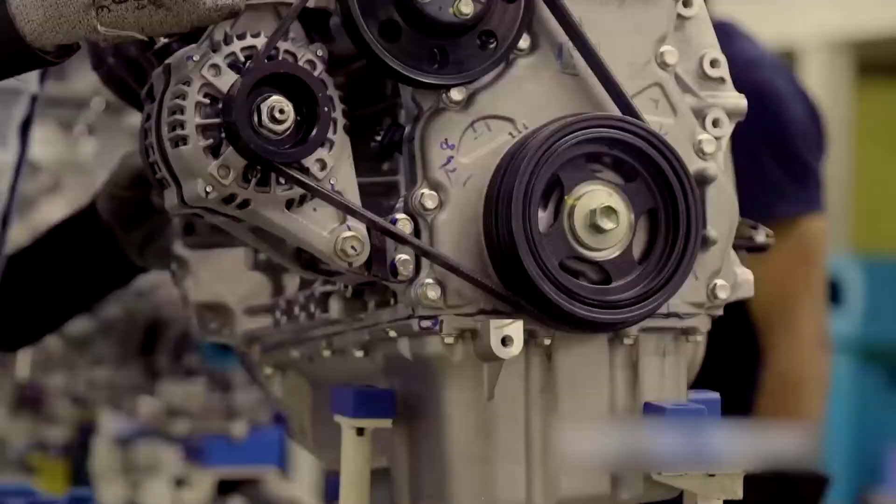Sustainable development is the only option. With half the planet already living in urban areas, and with each passing year, more and more people are drawn towards the urban lifestyle. For some, every challenge is an opportunity to test the mettle. No task and no milestone is unsurpassable.

This is the trait and temperament that defines the character of Ahmedabad Urban Development Authority. As a premier urban development authority, AUDA has always excelled and performed in the interest of the people at large in town planning schemes and implementation of infrastructure projects. AUDA enjoys ardent support from the state government for actualizing the dream of our Honorable Prime Minister, Shri Narendra Modi, to provide a better quality of life and services to people by implementing the Urban Project.

Realizing urban projects with compatible infrastructure that matches with standards of metropolitan cities will support balanced growth of Ahmedabad and Gandhinagar. The unequivocal credit for this feat goes to Team AUDA, guided and nurtured by the Chief Minister of Gujarat, Shri Bhupendra Patel. AUDA is dedicated to bringing urban dreams into reality by creating future-oriented plans and following up on them assiduously. This dedication of the AUDA team has resulted in the kind of public support no other urban development authority enjoys.

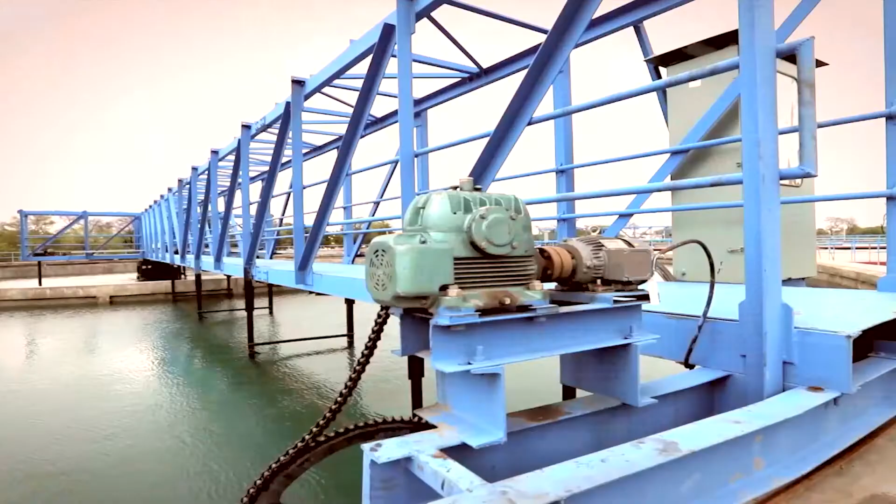Established under the Gujarat Town Planning and Urban Development Act of 1976, AUDA began its journey on February 1, 1978, marking a new era in the planned and balanced urbanization of Ahmedabad.

Currently, AUDA covers the entire area of 1,866 square kilometers, including 488.17 square kilometers area under the Ahmedabad Municipal Corporation, 34 square kilometers under the Gandhinagar Municipal Corporation, 5 growth centers of Kalol, Dehgaam, Sanand, Bareja and Mehmedabad, and 159 villages in the vicinity.

With its dedicated strong team, AUDA has developed several world-class facilities and handed over many of these utilities to Ahmedabad and Gandhinagar municipal corporations. Driven by its vision to make Ahmedabad urban development area compact, integrated, planned and well-connected, AUDA is continuously striving for sustainable urban planning.

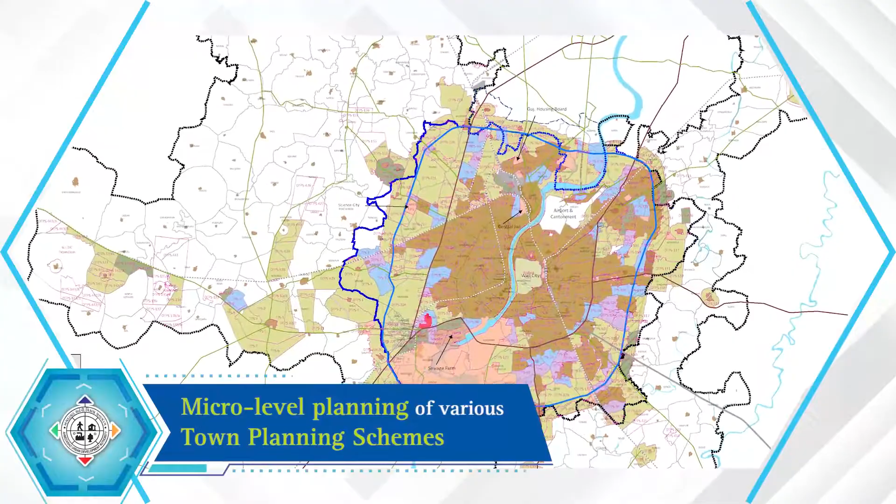Development Plan 2021: to meet the comforts and needs of the area, AUDA conceived the Development Plan 2021. The three-tier planning envisages firstly a macro development plan, planned through micro-level planning of various town planning schemes, followed by a local area plan, involving the retrofitting of the existing area for accessibility, walkability, connectivity and the refurbishment of existing physical infrastructure.

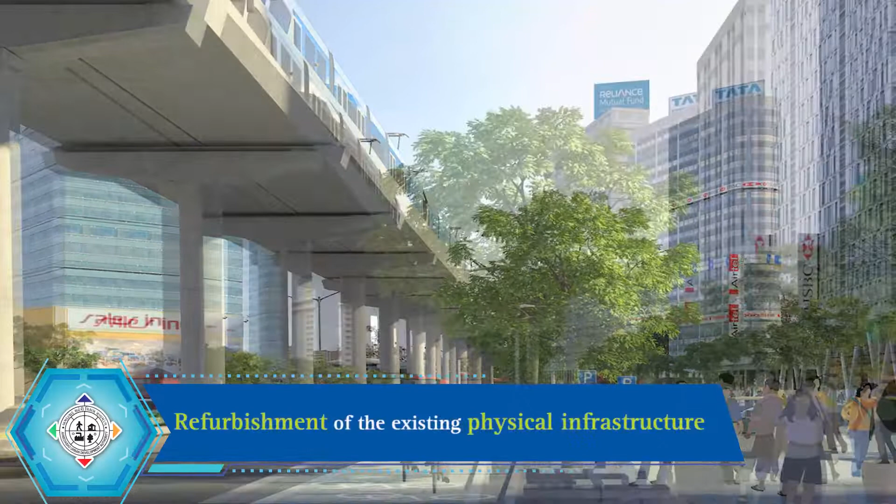It is estimated that 70% of the world's population will be dwelling in cities by 2050. This estimate predicts that Ahmedabad's population would shoot up to 108 lakhs by 2031. This poses both challenges and opportunities.

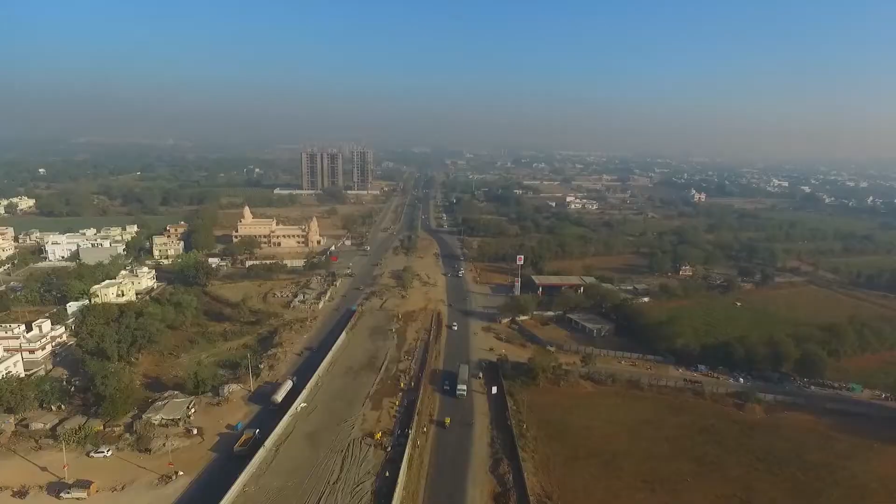To cater to the needs of the future population, Ahmedabad Urban Development Authority strives to implement urban planning and development practices with a focus on creating sustainable infrastructure to support its economic activities and overall growth, as well as facilitate a vibrant, lively and safe urban environment.

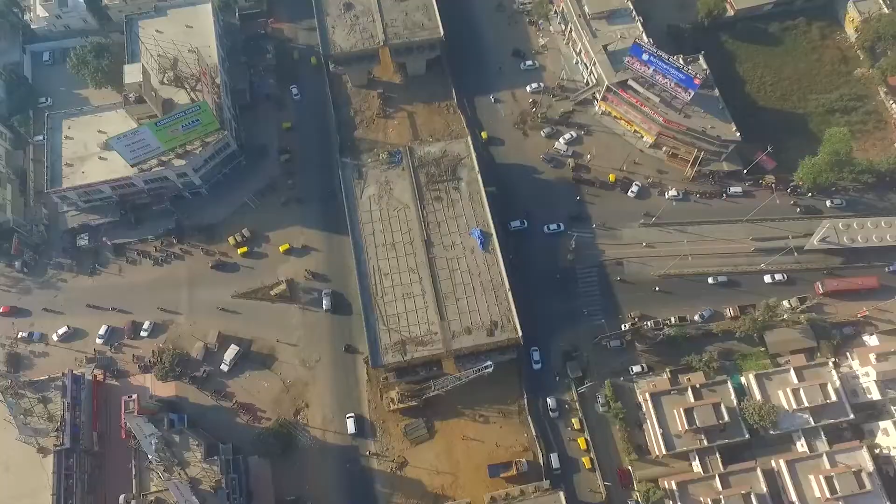Through AUDA's meticulous planning, Ahmedabad is all set to be a metropolitan city. Development Plan 2021 envisages a Central Business District or CBD, a transit-oriented zone or TOZ, a residential affordable housing zone, conservation of heritage sites, a dedicated freight corridor with logistics stations, a multi-modal logistics park to promote automobile and allied industries, besides fostering a green network.

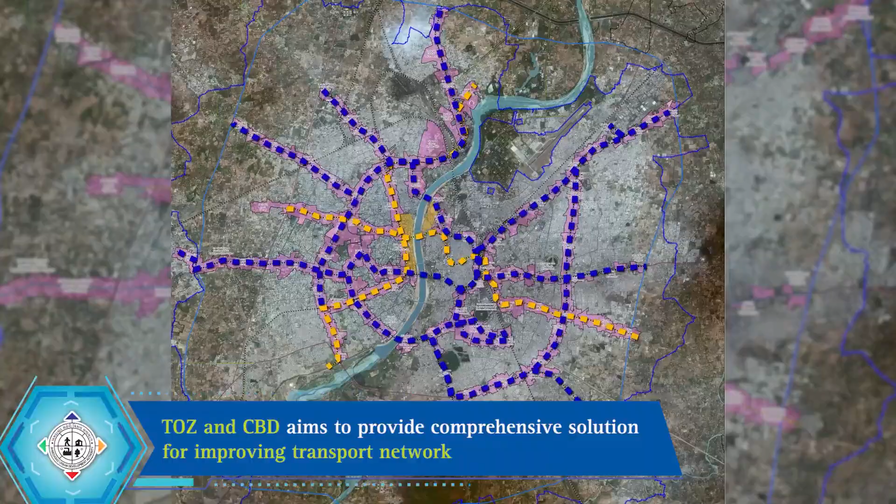Local Area Plan envisions both neighborhood-level accessibility and area-level improvement through a natural process of urban renewal and planned redevelopment. AUDA is preparing LAP and it is being implemented successfully by AMC. Local Area Plan for TOZ and CBD aims to provide comprehensive solutions for improving transport network, walkability and accessibility, implementing parking management, upgrading physical and social infrastructure, and enhancing overall livability and economic viability of a city.

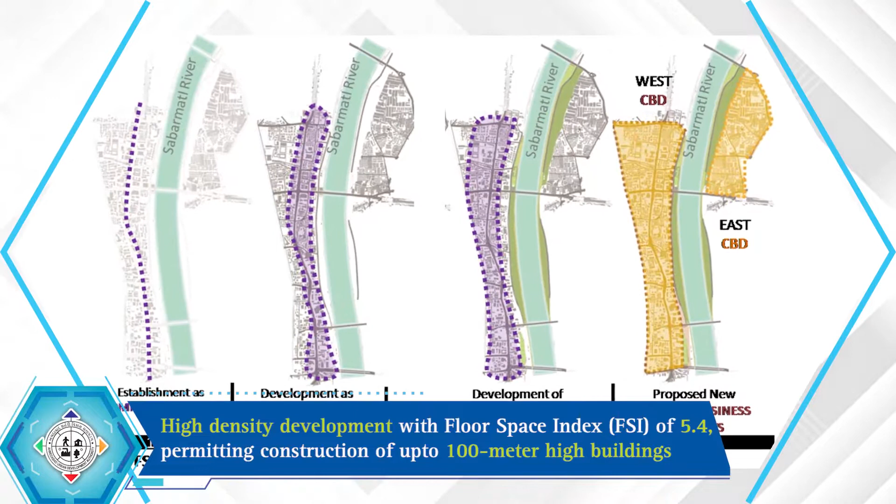Central Business District: AUDA has designed a central business district, ensuring easy mobility in high-density areas. To create a mixed-use, high-density district with a distinct character and a clearly identifiable urban form, AUDA has proposed high-density development with a floor space index of 5.4, permitting construction of up to 100-meter high buildings.

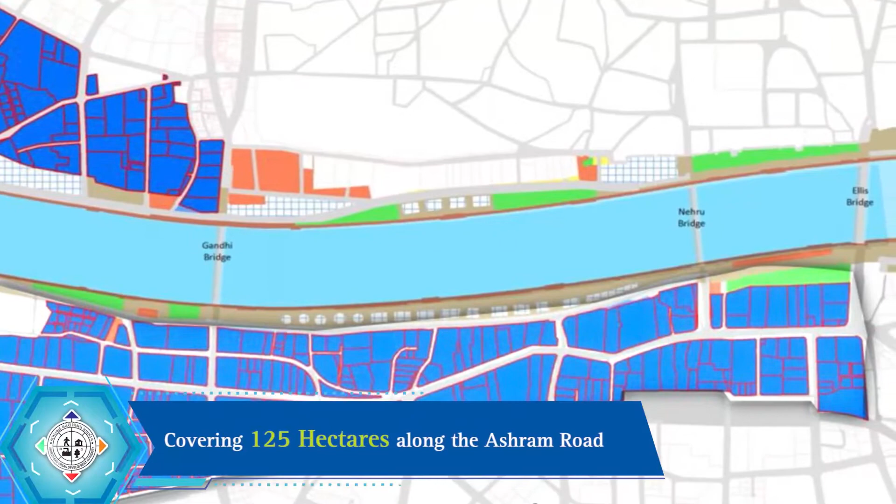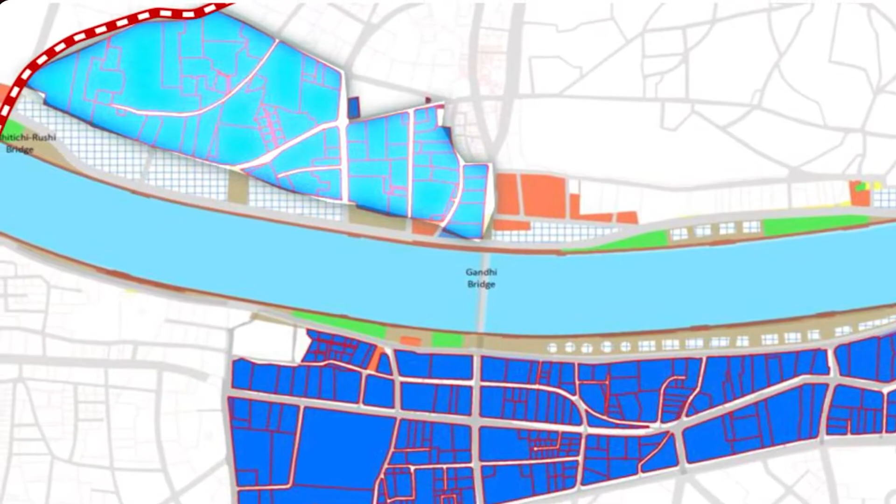These will come up on both sides of the rapidly developing Sabarmati riverfront, while one central business district focuses on the western side, covering 125 hectares along Ashram Road, a centrally located business hub of the city, between Ellis Bridge and Usmanpura. The second one focuses on the eastern side, on a 52-hectare area between Gandhi Bridge and Dudheshwar. Both the CBDs have bus rapid transit system and metro network connectivity.

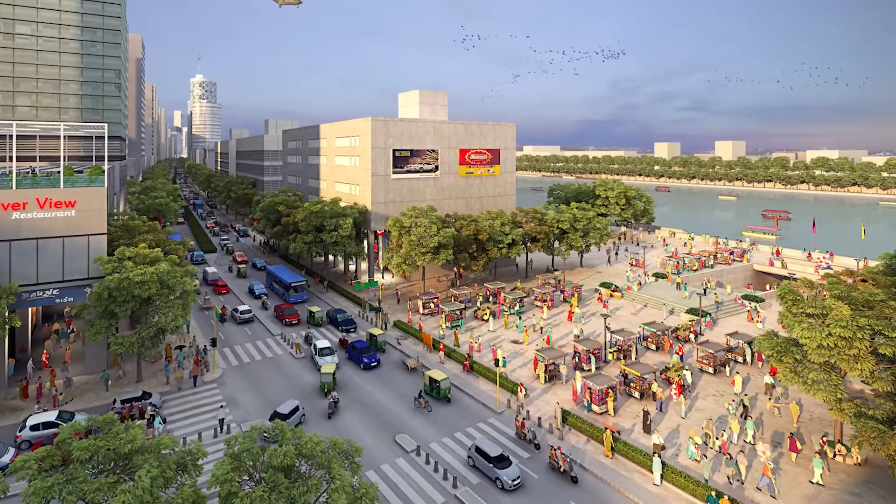AUDA has also provisioned for building a bridge to provide easy accessibility to both the CBDs. The CBD plans conceptualize a cohesive urban form and a pedestrian-friendly environment, besides arcades and wider sidewalks, to promote a mixed-use, transit-oriented, walkable CBD that is attractive for business, entertainment and tourism.

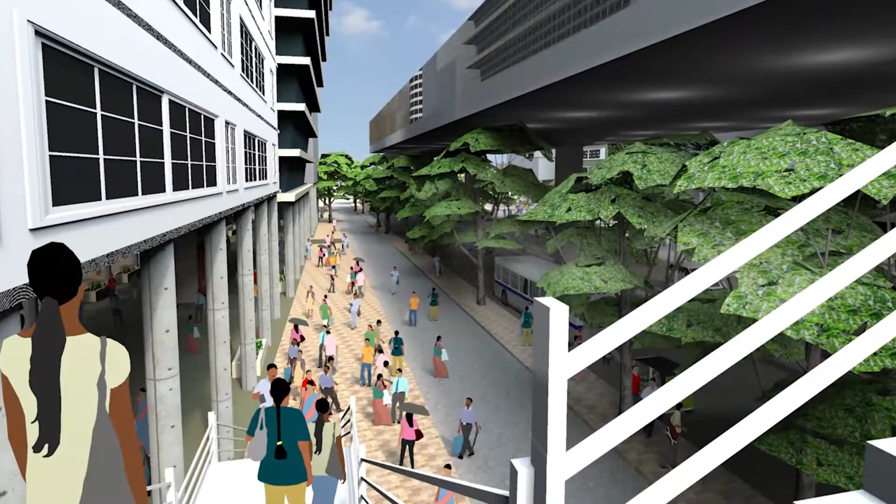Transit-Oriented Zone, or TOZ, is an effective tool to promote compact, mixed-use, high-density vertical development within walking distance to public transit routes, with a pedestrian-friendly and accessible public transportation network. It shortens commute times, promotes non-motorized transport and reduces dependency on private modes of transport.

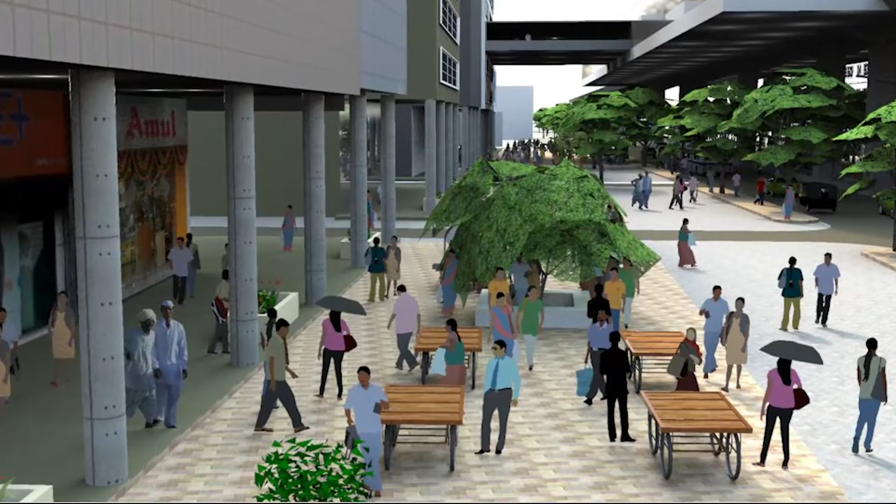Today, Ahmedabad already has an excellently connected road network of nearly 5,200 kilometers. The TOZ will make the city more livable by connecting places of work with residential areas, supported by walkable and cycle-friendly neighborhoods, reducing the carbon footprint in doing so.

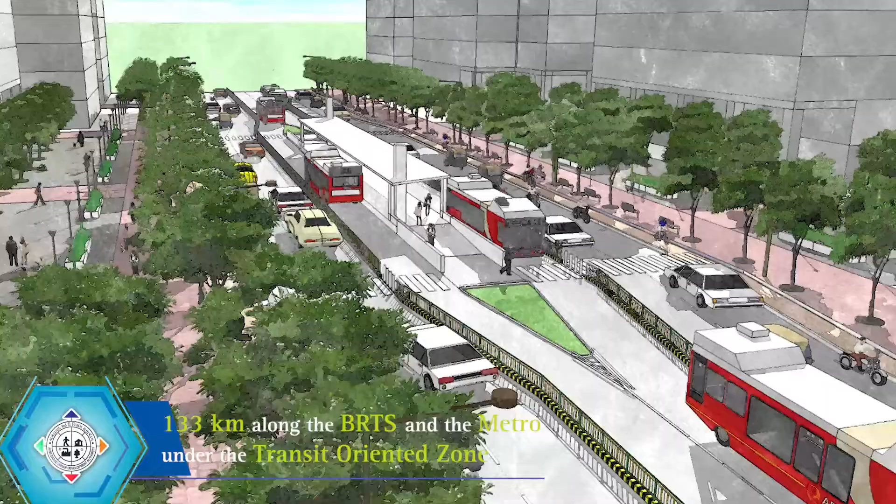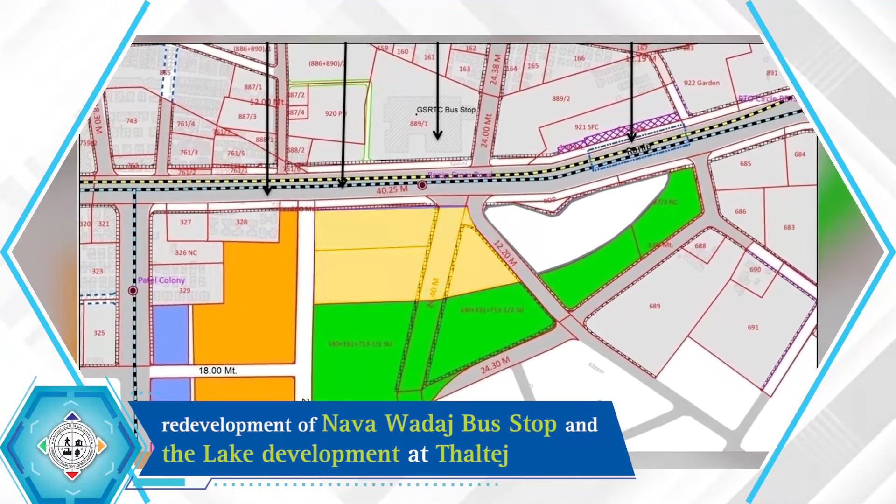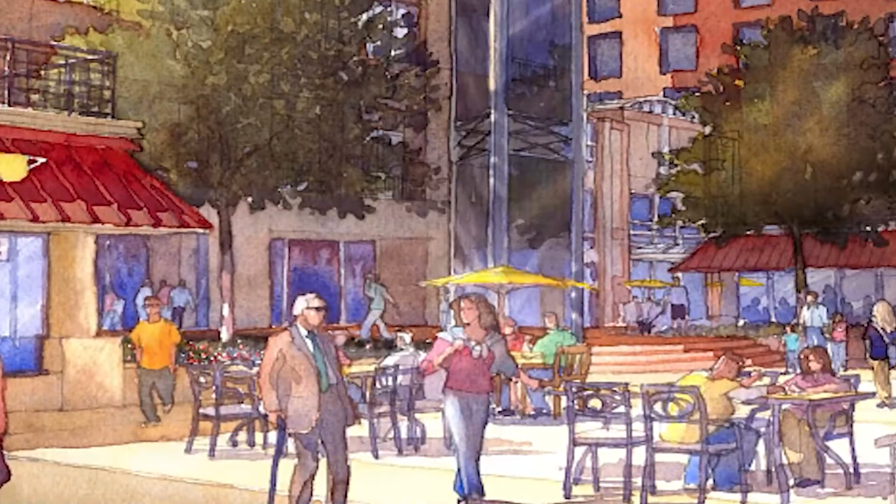AUDA has proposed to build a plaza with amenities like green and shaded seating areas, a pedestrian-friendly environment, public utilities and well-managed parking facilities around the 137 BRTS and 51 metro stations, providing an opportunity for commuters to relax, unwind and refresh themselves en route. CBD and TOZ are the modern-age urbanization wonders.

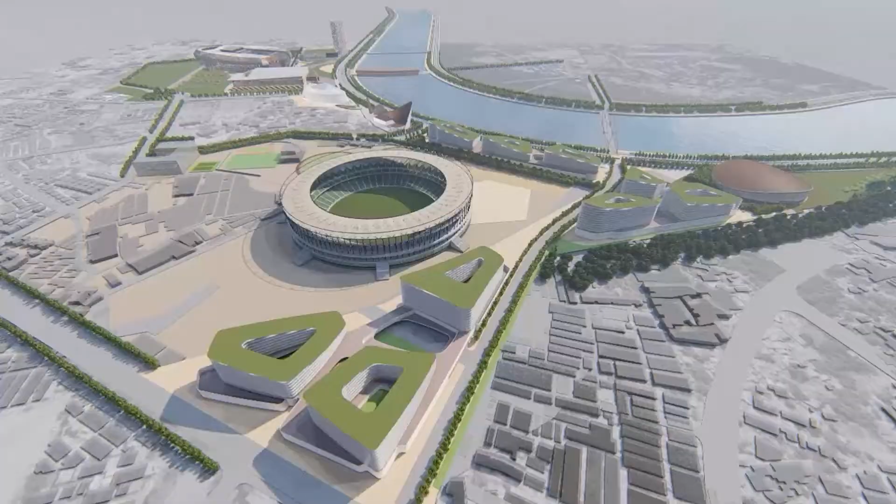Sardar Patel Sports Enclave: one of the largest projects generated through local area plan, the Sardar Vallabhbhai Patel Sports Enclave. In August 2019, Honorable Prime Minister Shri Narendra Modi launched the nationwide Fit India movement, encouraging people to adopt a healthy lifestyle by weaving physical activities and sports into their daily lives.

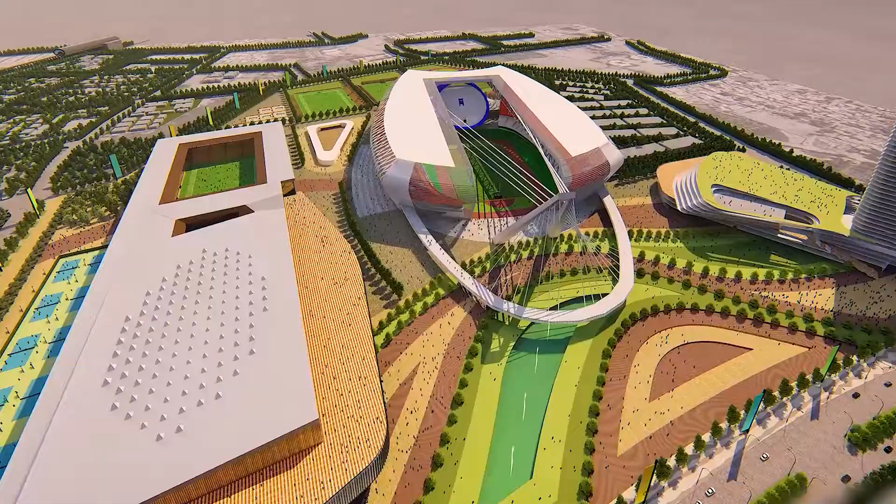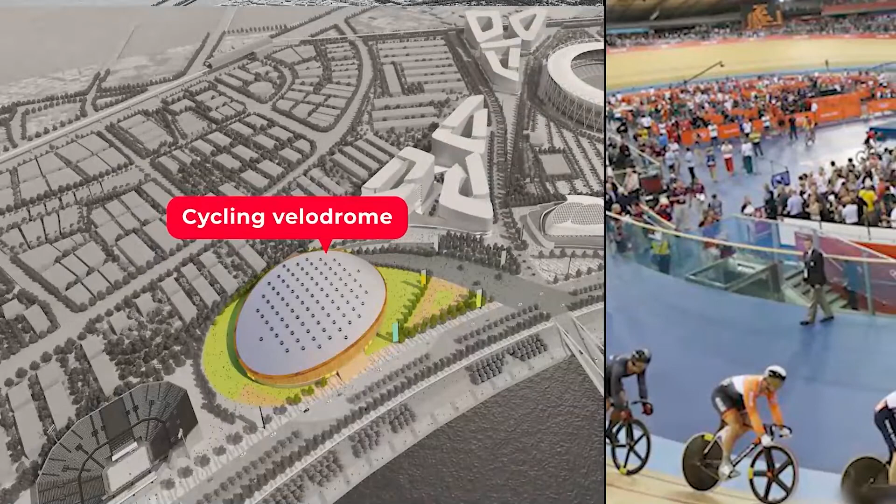A giant leap in this direction is the proposed Sardar Vallabhbhai Patel, or SVP, Sports Enclave. With an eye on the Olympics, a master plan for the SVP Sports Enclave has been prepared, wherein an area of 215 acres has been earmarked, of which the multi-level world-class sports stadium, the Narendra Modi Stadium, occupies 60 acres.

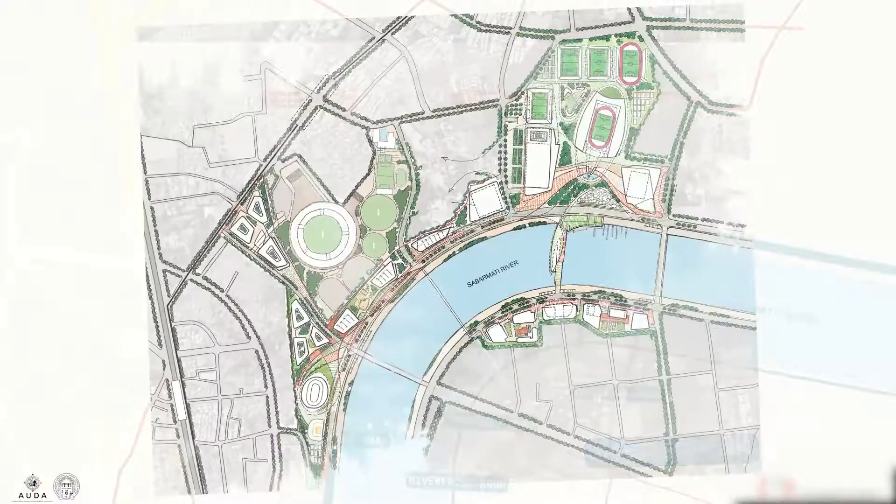Facilities for more than 20 sports activities have been proposed as part of the master plan, along with an athlete village and other international standard amenities. The estimated outlay for the proposed SVP Sports Enclave is about 4,600 crore rupees.

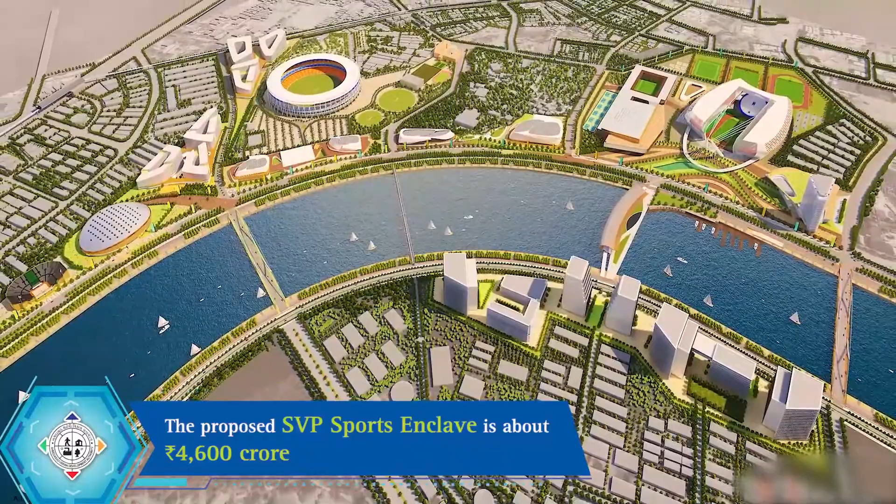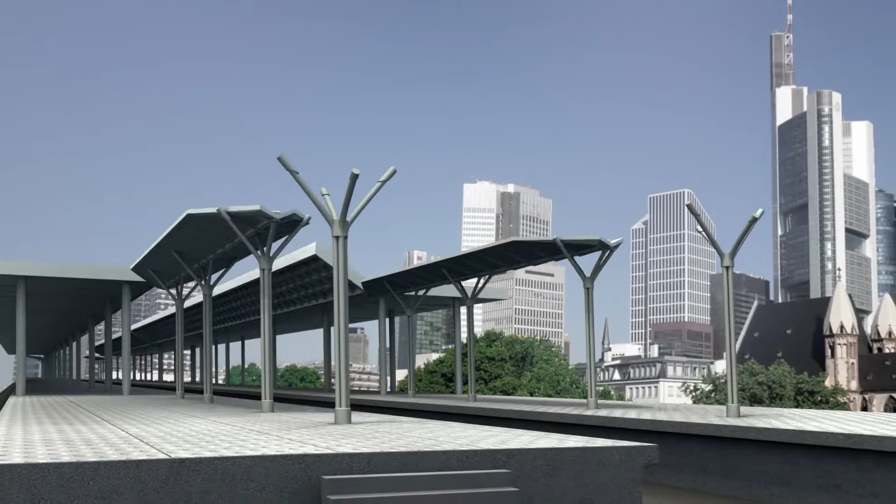High-Speed Rail Station Area Plan. The High-Speed Rail Corridor proposes to create an identity for the station area as a destination of integrated purposes. The total length of the high-speed rail would be approximately 508 kilometers, covering a total of 12 high-speed rail stations en route between Ahmedabad and Mumbai. There are 2 stations in Ahmedabad: Sabarmati and Kalupur.

AUDA, under local area planning, has proposed the development of the Sabarmati railway station area, covering an area of 645 acres, which will facilitate station area development that matches the needs of the high-speed railway station and eventually increase economic activities.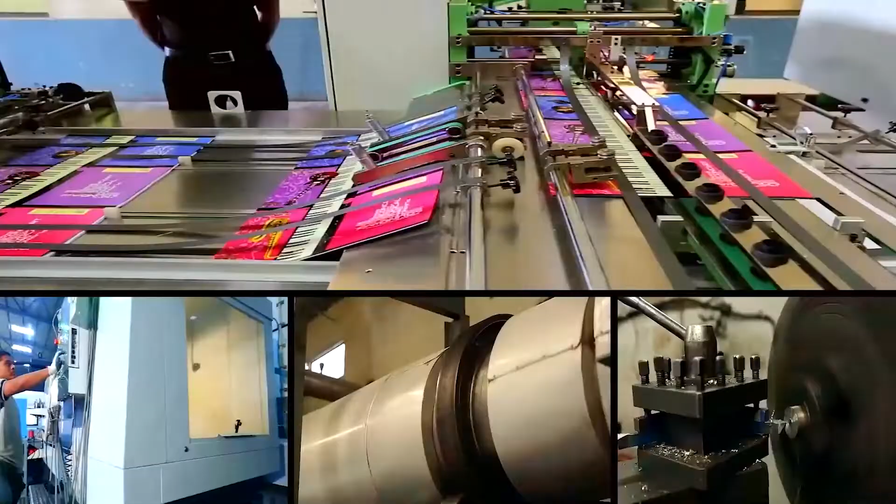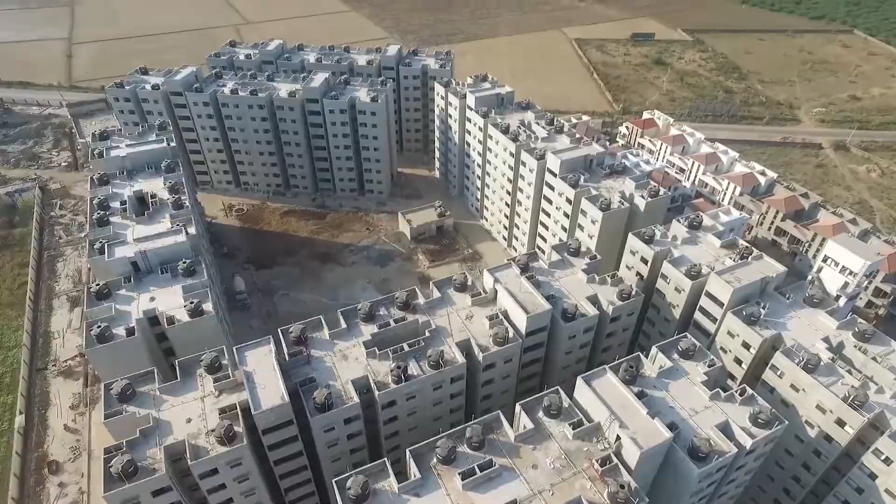Residential Affordable Housing Zone. As the city broadens its boundaries with growing economic and industrial activity, the need for more than 10 lakh dwelling units has arisen to actualize the Honorable Prime Minister's vision of housing for all. AUDA has identified residential affordable housing zones within a 1-kilometer wide stretch on the outer side of Sardar Patel Ring Road, covering around 80 square kilometers of land area, along with areas like Ghuma and Shela.

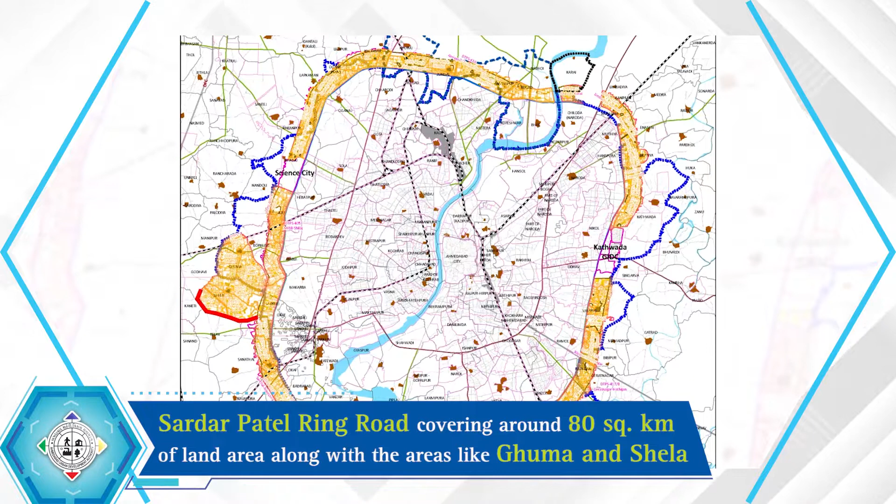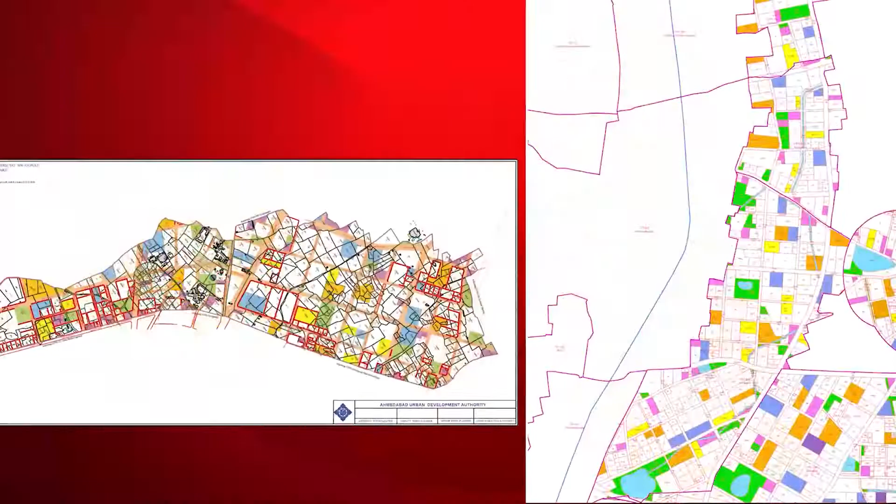A well-integrated scheme of residential affordable housing in Development Plan 2021 will target a saturated gross high density of 500 persons per hectare for an anticipated population of 40 lakhs by the year 2045.

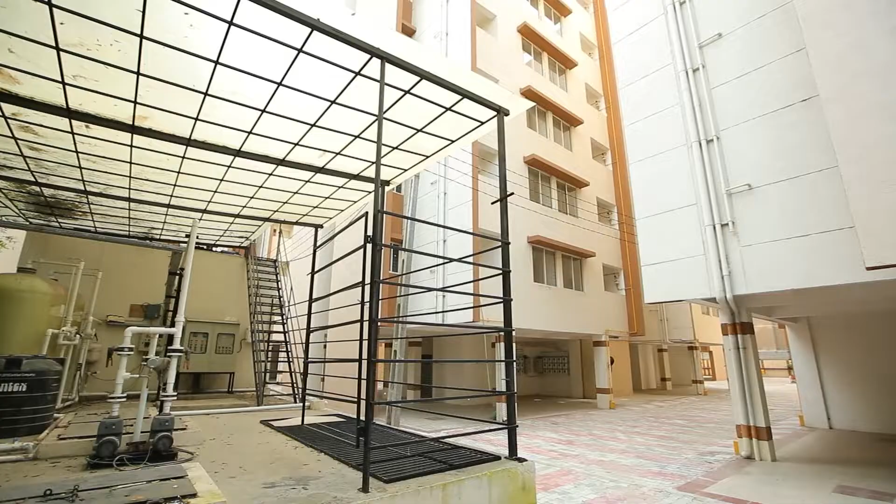AUDA has achieved commendable results under the Pradhan Mantri Awas Yojana (PMAY), an affordable housing scheme, by incorporating it with the existing RA zone, and has further enhanced it by providing housing replete with all basic amenities like electricity, sewage system with STP plant, clean water and security. Economically Weaker Section (EWS) societies have been planned to have good public transport connectivity and green open spaces. Under the green building concept, PNG pipeline and solar rooftop panels are also provided.

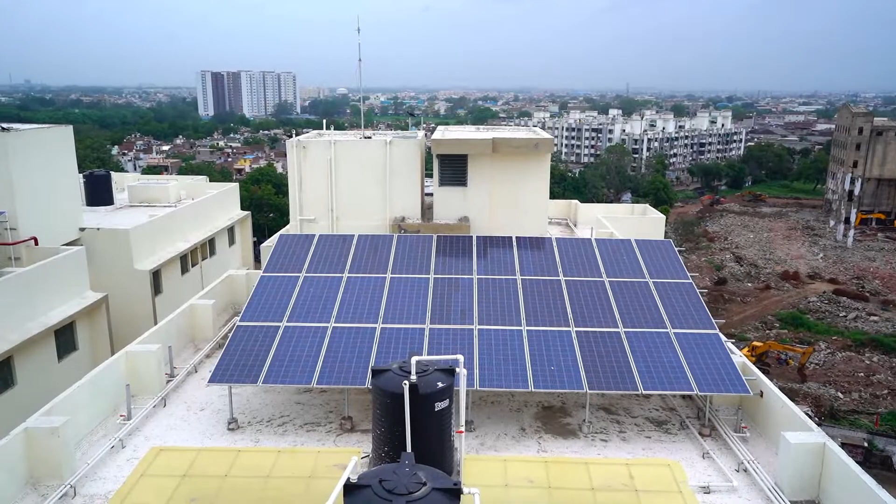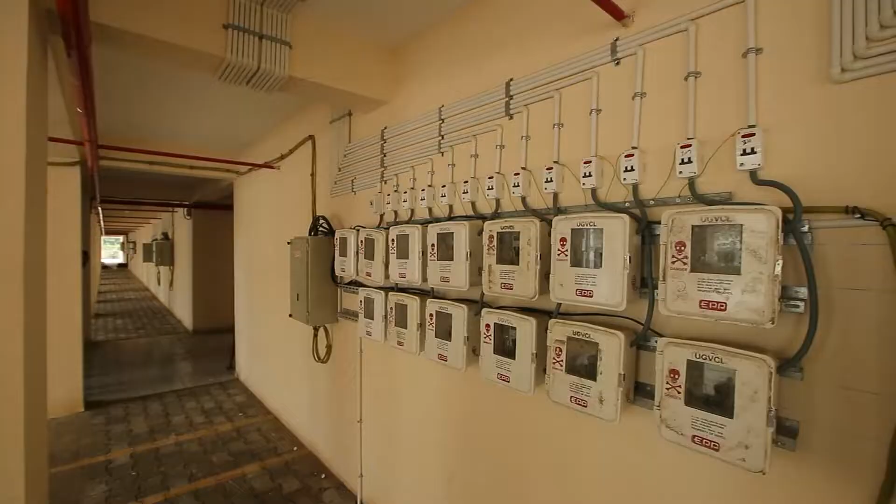EWS housing with solar rooftop panels: AUDA has proposed installing solar rooftop panels in many of its EWS projects, using the electricity generated for running amenities like elevators, water motors and common area lights. This has not only reduced maintenance cost by about 1,000 rupees per family by lowering electricity bills, but also helps significantly lower the carbon footprint.

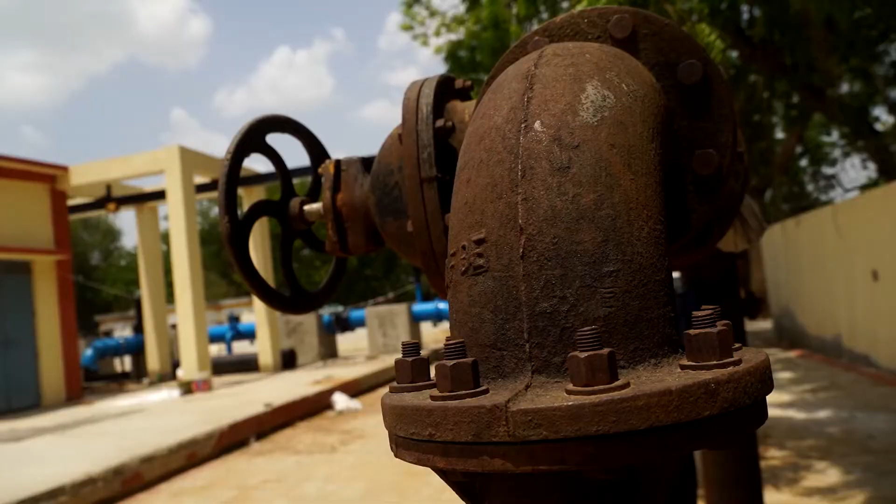EWS housing with grey water management: AUDA is focusing on sustainable management of water resources through dual plumbing and grey water management in the EWS8 scheme, and a sewage treatment plant in Lake Garden. This promotes sustainable wastewater management, as treated water can be used for toilet flushing, gardening and landscape irrigation.

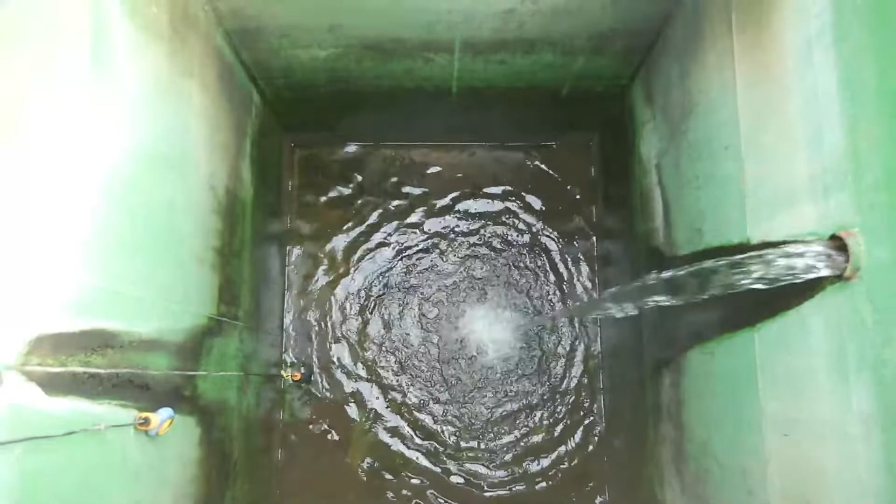Recycled water by dual plumbing system results in savings of 30% of fresh water quantity. Treated water can also be stored in percolating wells, which in turn helps in groundwater recharge.

AUDA EWS status: AUDA has completed a total of 32 EWS projects, benefiting 22,189 houses and more than 1,10,000 people. Also, 3 more projects are under development.

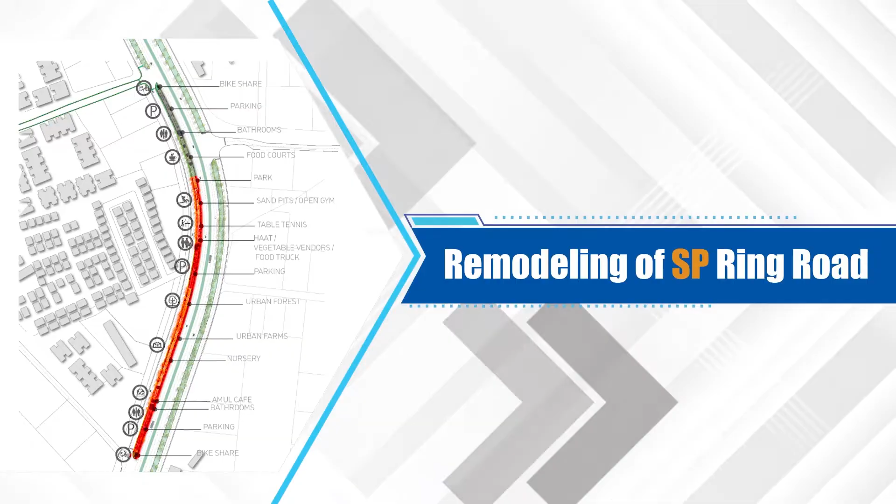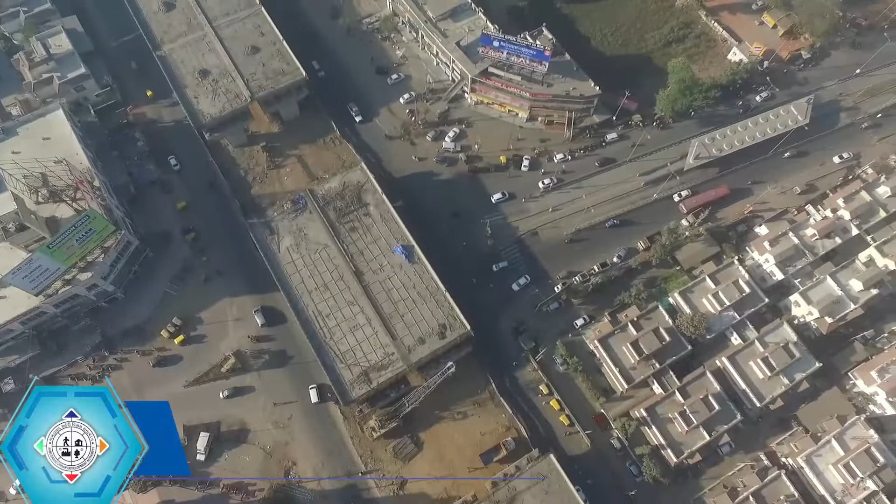Remodeling of SP Ring Road. Mobility is the mainstay of our economy, and the Sardar Patel Ring Road, which provides free-flowing traffic on the outskirts of the city, epitomizes it. AUDA has gone a step ahead to remodel this 6-lane road to further ease traffic and make the region more interconnected, facilitating segregation of regional and local traffic.

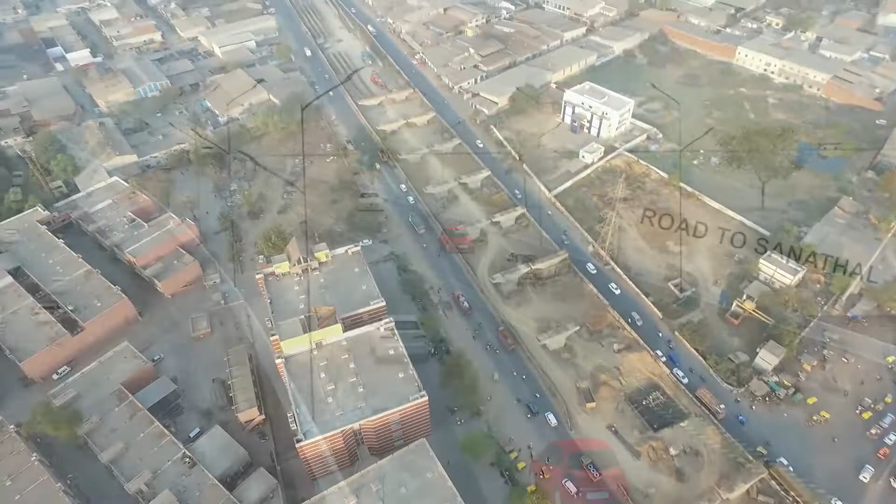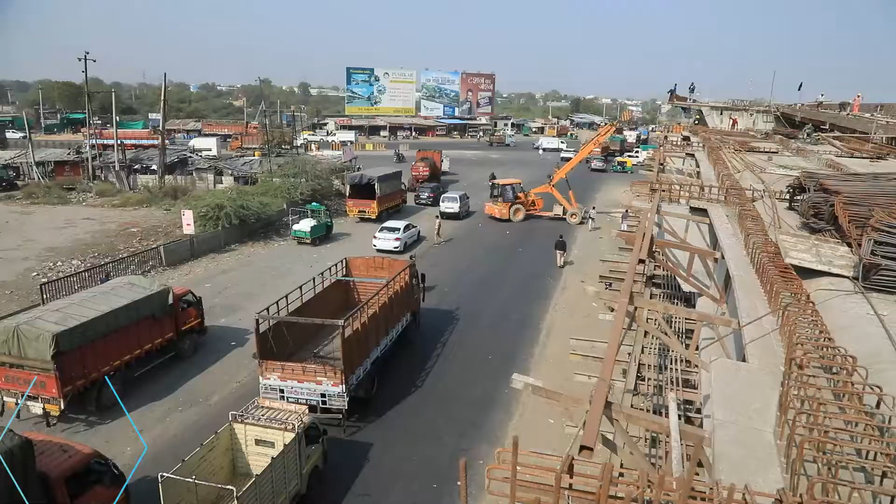AUDA has undertaken construction of multimodal bridges for metro commuters and providing road safety to its people. These include 3 flyover bridges at Zundal, Dehgam and Shantipura, 2 rail overbridges at Sanathal and Ranasan, 1 pedestrian foot overbridge at Vastra, and 2 3-layer underpass development bridges at Science City and Memadpura Junction across the SP Ring Road.

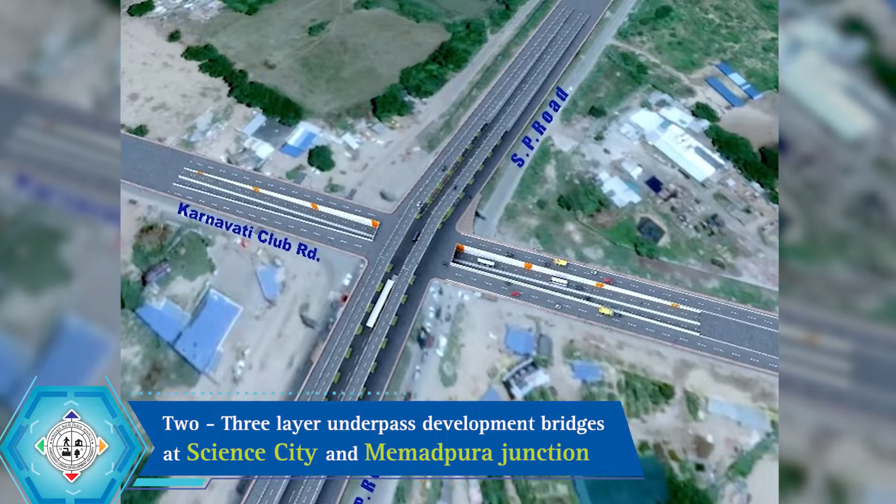The overbridges at Ambli, Odhav, Dehgam and Zundal are completed, and the rest are under construction. In the near future, AUDA plans to build 10 new flyovers on the SP Ring Road for hassle-free movement of traffic. Installing street lights covering the entire SP Ring Road for the safety of residents, pedestrians and commuters has been one of AUDA's top priorities.

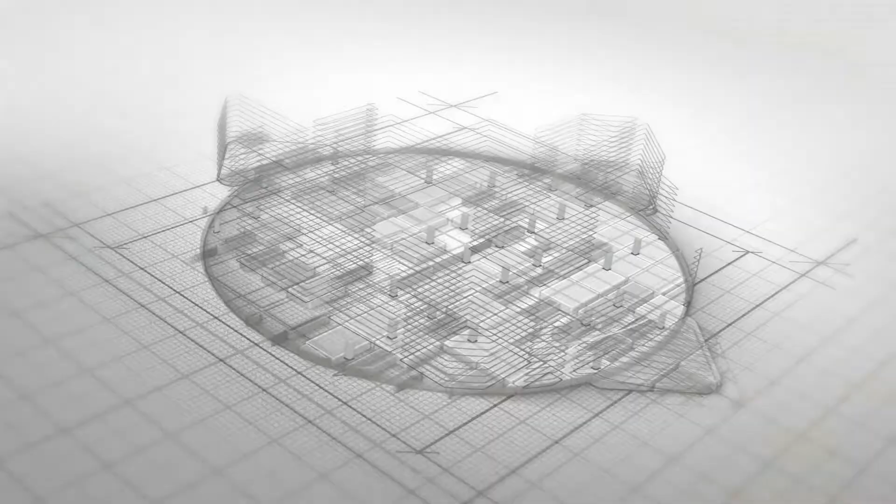AUDA, with more than a decade of experience in building flyovers and bridges over junctions, has created successful benchmarks. All these infrastructural projects are planned with an integration of the existing AMC infrastructure, foreseeing future growth and development.

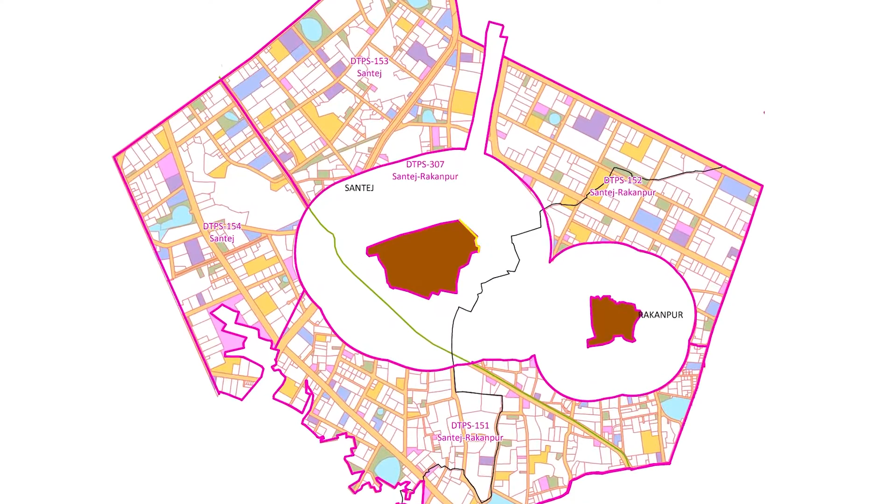Industrial Zone: Robust industrial zones are a prerequisite to economic growth, support industrial development and generate employment. With a well-connected transportation network and infrastructure, AUDA has proposed an industrial zone of about 130 square kilometers, which is 6.8% of the total zone area. AUDA has initiated TP schemes in the industrial zones of Santej, Rakanpur and Khoraj Sanand areas.

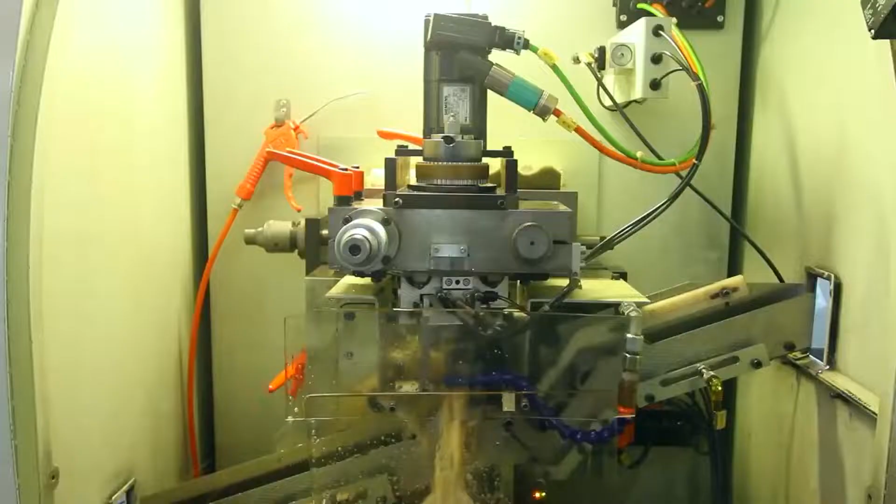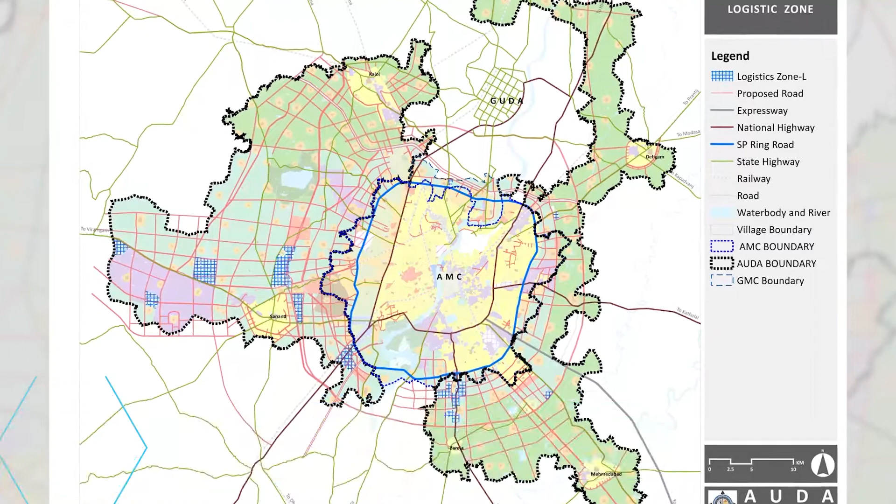DFC and Logistics Zone: Dedicated freight corridors and logistic zones are imperative to any success story, as they provide growth momentum. AUDA has identified a logistic zone under the Development Plan 2021 to develop about 40 square kilometers of area into commercial and logistic zone, which is 2% of the total zoned area. Town planning schemes of the logistic zones are also prepared for the areas of Godhavi, Kaneti and Nidhrad.

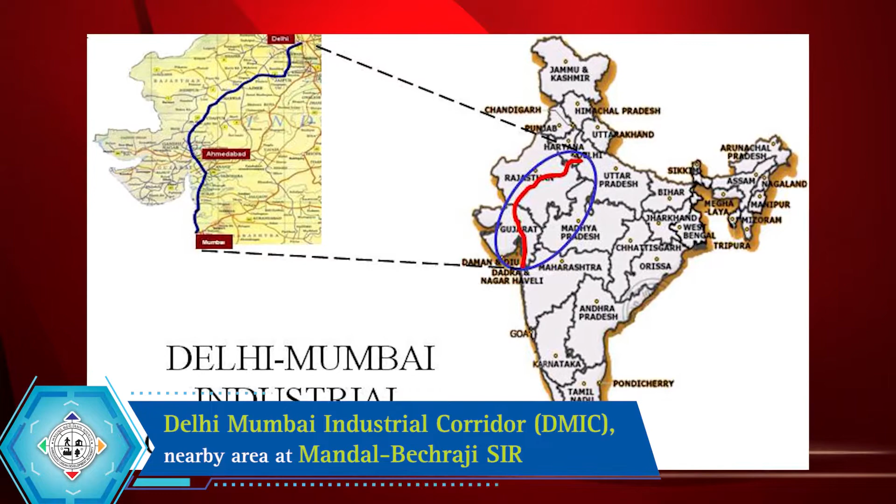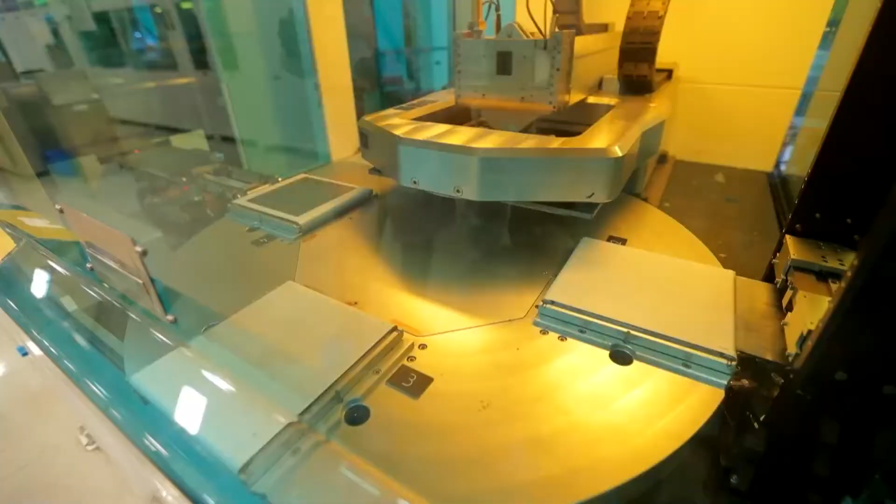The Delhi-Mumbai Industrial Corridor, an ambitious project of the central government that runs across some AUDA area near Sanand, would be a game changer in attracting global investments. Special projects like the Delhi-Mumbai Industrial Corridor or DMIC, Special Investment Region in the nearby area at Mandal-Bechraji SIR, Gujarat International Finance Tech City (GIFT), and Special Economic Zones or SEZs would generate interest and attract global investments.

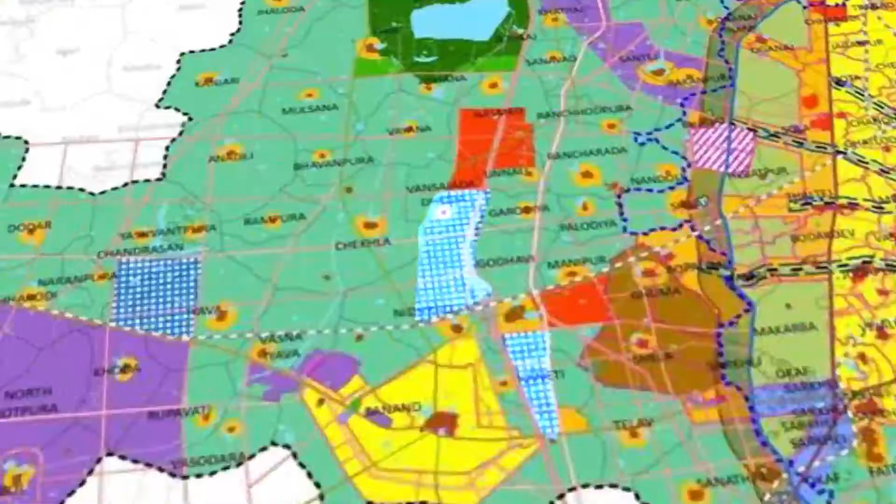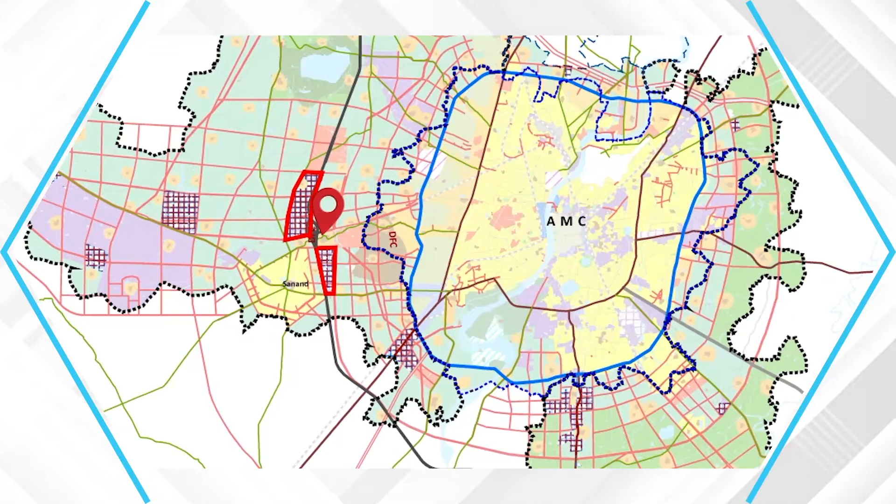AUDA's development planning vision has led to the integration of land use and freight movements of the dedicated freight corridor with a sizable logistic zone and general industrial zone within the vicinity of DFC. The Gujarat state government has initiated an ambitious project to develop a multi-modal logistic park at Sanand DFC station. Advanced town planning schemes would provide the necessary fillip to transform this ambitious infrastructure project into a reality.

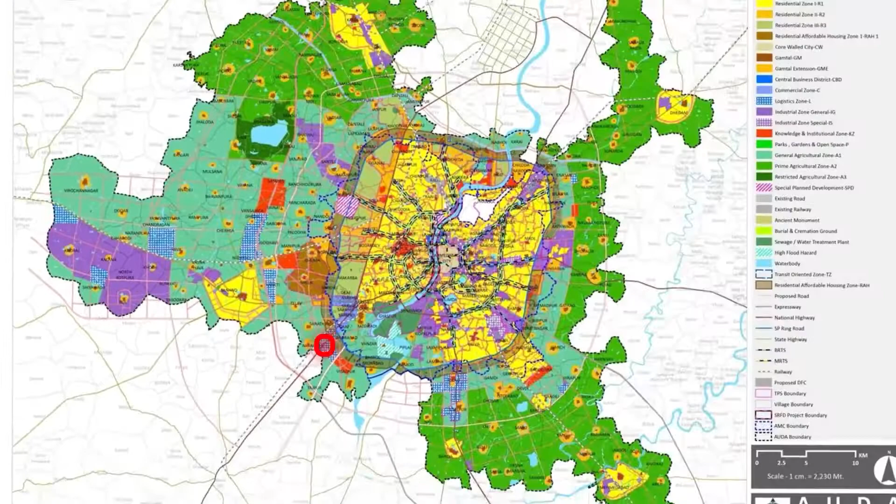Exclusive logistic zones are being proposed with rail and road-based networks identified at all major entry points of Ahmedabad. This will magnify the reach of industries in one of the fast-growing cities of the world. The Development Plan 2021 includes about 7.2 square kilometers of land under logistics zone for development of godowns and warehouses on the national highway near Aslali, Navapura and Sanathal.

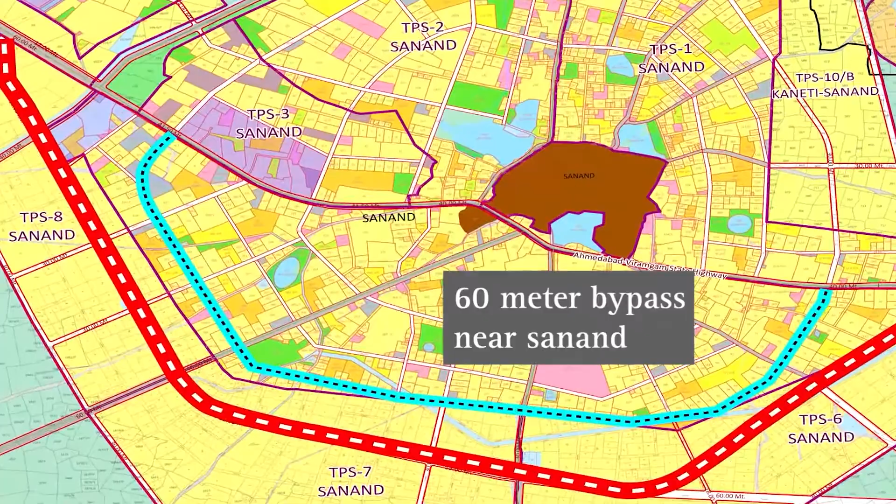A 60-meter bypass around Sanand provides easier and faster movement for heavy vehicles and curtails traffic congestion in the central area of Sanand. Knowledge and Institutional Zone follows.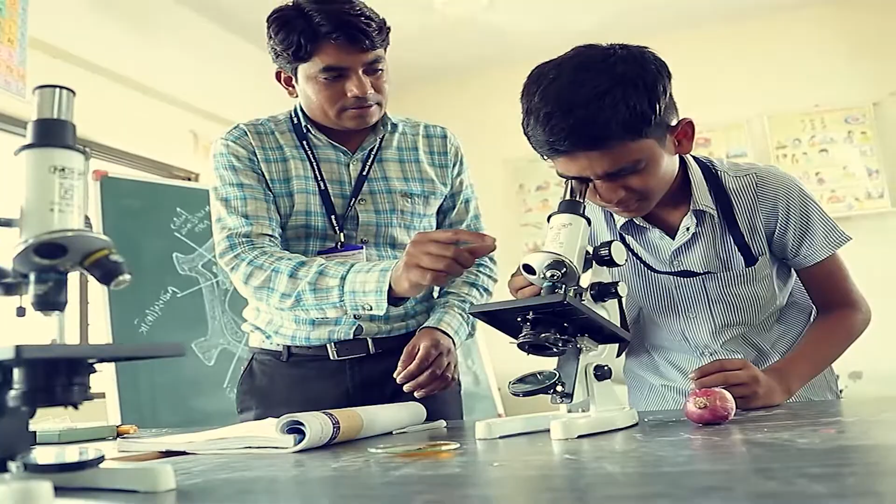AUDA has identified various areas in the eastern and western parts to encourage, promote and facilitate development of large education and research institutes through provision of the Knowledge and Institution Zone. Under the Development Plan 2021, an area of approximately 24 square kilometers has been earmarked, constituting 1.3% of the total zoned area. Schools, colleges, universities, education and research centers and campuses shall come up in this zone.

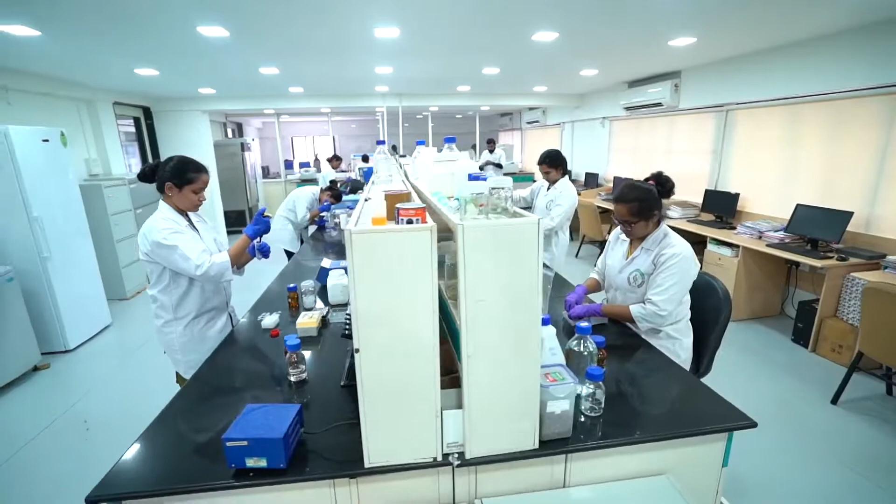Heritage Conservation: Ahmedabad, the more than 600-year-old city, pulsating with progress and prosperity, has had the distinction of being India's first UNESCO World Heritage City in 2017.

Around 800 heritage structures like the residential clusters called pols, the havelis, chabutras or bird feeders, the darwazas or gates, stepwells, places of worship and monuments have been identified. The promotion and conservation of the identified monuments in the AUDA area is taken care of by AUDA through comprehensive general development control regulations to increase the rich culture and architectural heritage value.

Green environment, interlinking of lakes. Urban flooding of lakes often leads to potential socio-economic stagnancy as water seeps into low-lying regions and devours considerable time and investment to restore parity. AUDA displayed foresight by interlinking Aslali and Jetalpur lakes, an area prone to flooding during heavy downpour, thereby conserving precious water.

Lakes and gardens. Lake developments and gardens created at Ghuma, Khoraj, Bopal, Aslali and Singarwa are outstanding testimonials of AUDA's Green Network initiatives. Recently, new gardens have been completed by AUDA in Sanand, Bhat, Motera areas of the city.

AUDA is committed to enhance the green cover by at least 3 times in Development Plan 2021. Lakes under AUDA will be developed with regional urban parks and green spaces. The Singarwa Botanical Garden is a viewer's delight as it offers soothing greenery and an ensemble of rare species of plants. The eco-sensitive zone at the periphery of Thol Bird Sanctuary is demarcated for retaining its natural environment.

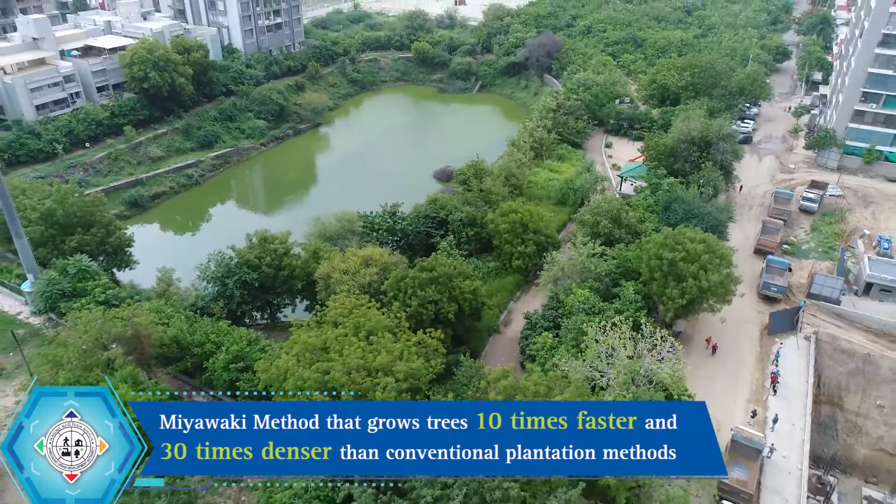AUDA has adopted the Japanese Miyawaki method that grows trees 10 times faster and 30 times denser than conventional plantation methods. An urban forest coming up under the aegis of AUDA is a step towards augmenting urban green spaces and improving cities' air quality. Miyawaki plantation is executed in almost all gardens developed by AUDA.

Hallmarks of the project: helps with groundwater recharge, acts as a green lung for the city, helps in reducing air pollution and contains carbon emission, grows like a 100-year-old natural forest within a short time span of 20 years. Under this initiative, about 1 lakh trees have already been planted by AUDA.

AUDA Engineering All Projects. AUDA has been redefining the peripheral city landscape by designing and constructing bridges, housing, social infrastructure like library, fire station, auditorium, sports complex and various physical infrastructure.

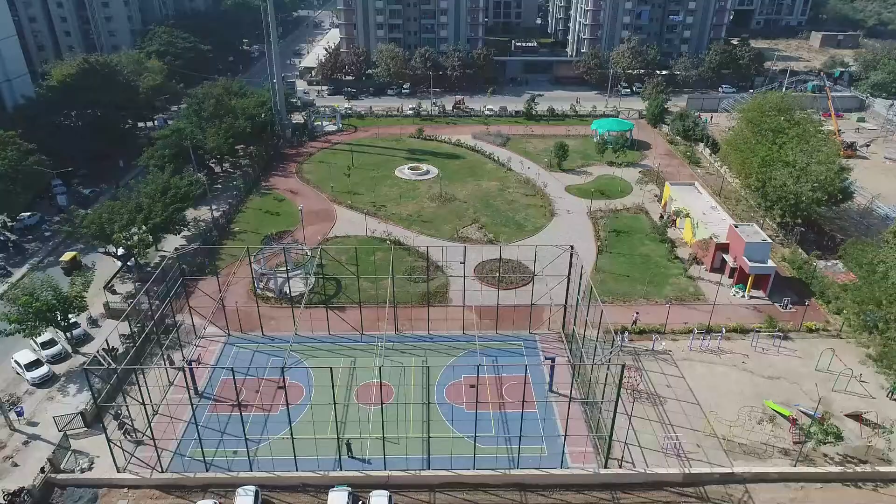In today's times when urban people are in search of sports grounds, AUDA has allocated space for sports activities in all TP schemes in the entire AUDA area, thereby providing proper avenue to develop sports complexes in the interest of citizens at large.

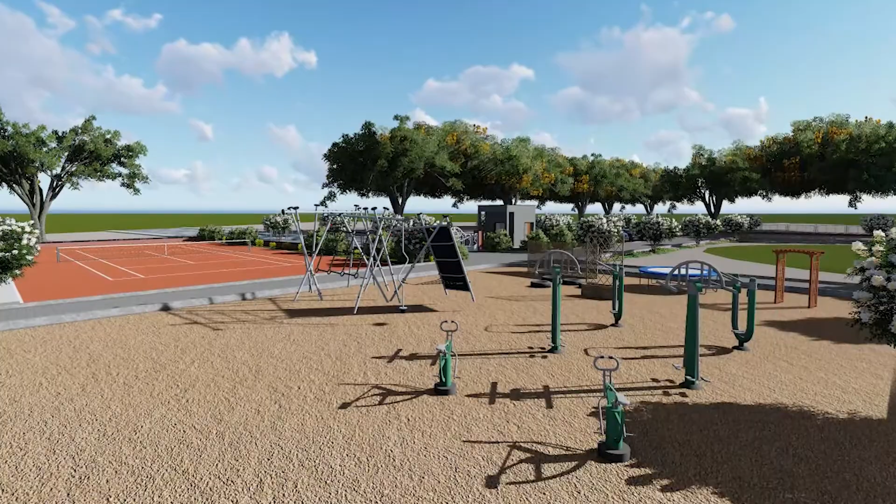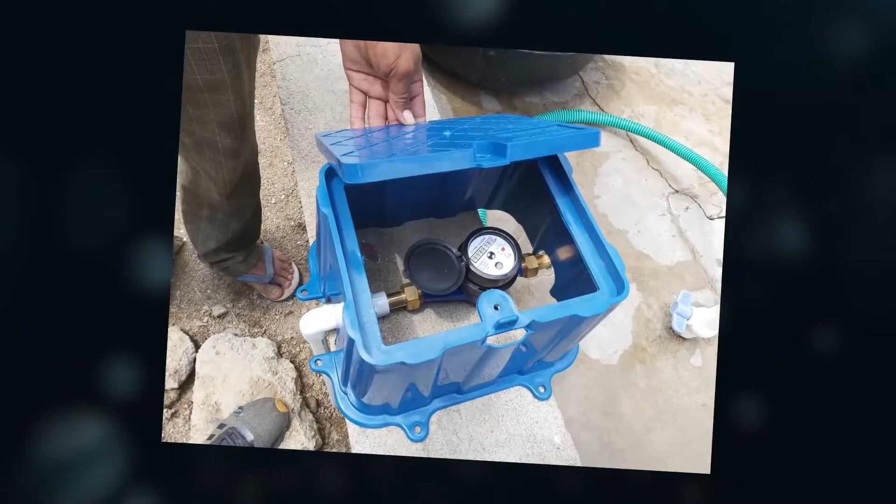Water supply project by AUDA. Water supply project in AUDA area: Bopal, Ghuma and Shela. Residents of Bopal, Ghuma and Shela in the western part of AUDA will soon have access to 24/7 safe and clean drinking water. Providing metered connection in every household will result in less water wastage due to leakages and more judicious use of precious water.

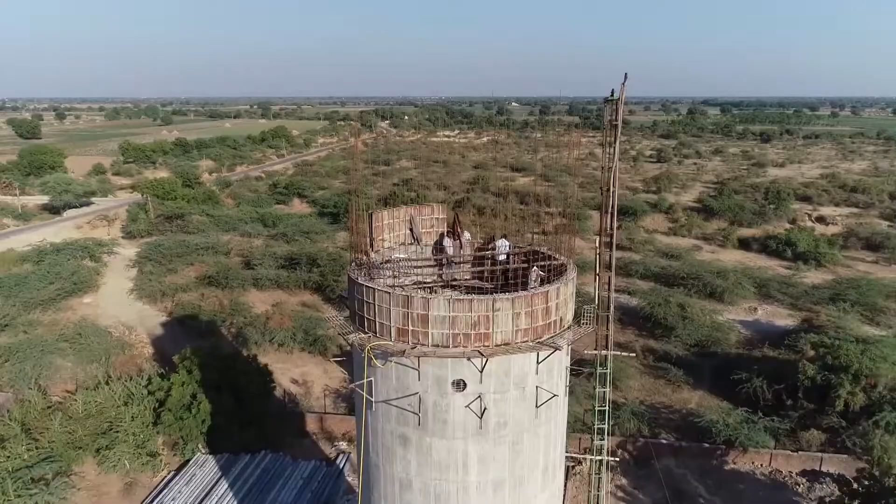Villages under Jal Jeevan Mission. The Jal Jeevan Mission, an initiative of Ministry of Jal Shakti, Government of India, strives to provide safe and adequate drinking water through individual household tap connections by 2024 to all rural households in India. The program will also implement source sustainability measures as mandatory elements such as recharge and reuse through grey water management, water conservation, and rainwater harvesting. The Jal Jeevan Mission will be based on a community approach to water and will include extensive information, education and communication as a key component of the mission.

Villages covered under the project. Under this mission, AUDA has covered 45 villages of Ahmedabad and Gandhinagar districts for the supply of potable water.

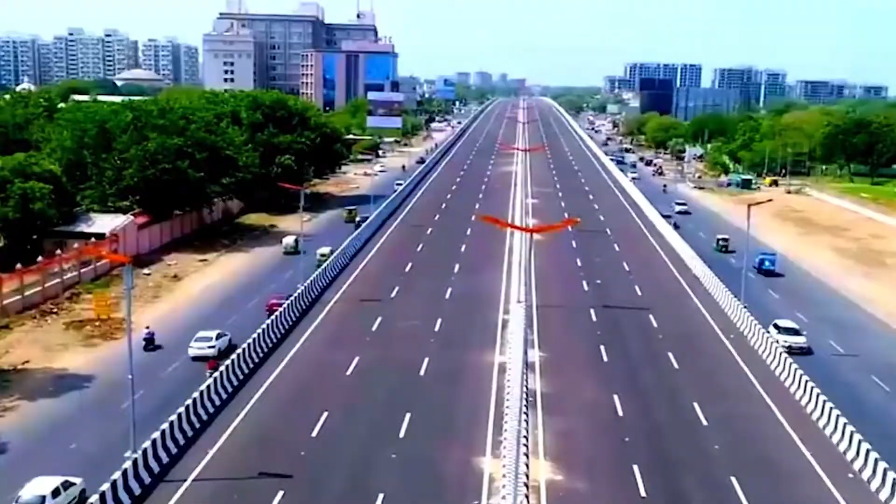ADB projects. Government of Gujarat has been working towards a safe, sustainable, economic, people-friendly urban infrastructure development in the state. AUDA has been at the forefront in realizing the dream of our Honorable Prime Minister and the state government in providing world-class urban infrastructure in rural areas also.

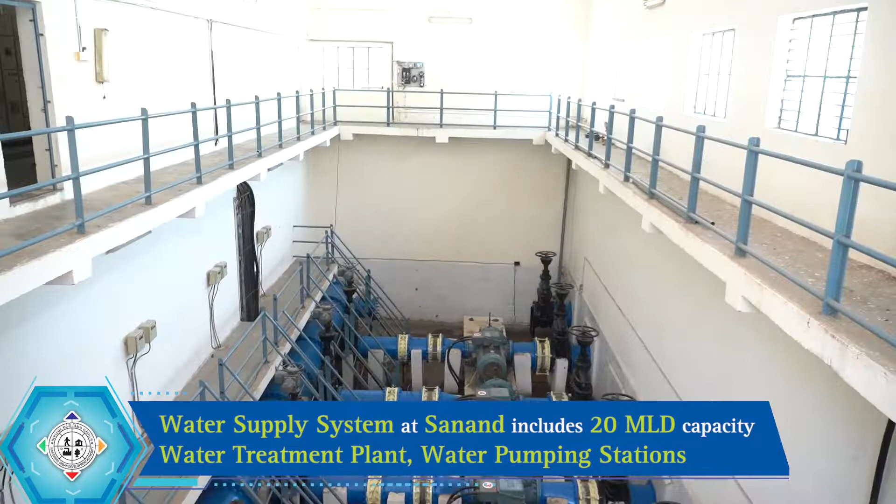Water supply system at Sanand includes 20 MLD capacity water treatment plant, water pumping stations, underground and elevated water tanks, and a water supply distribution network that connects every household.

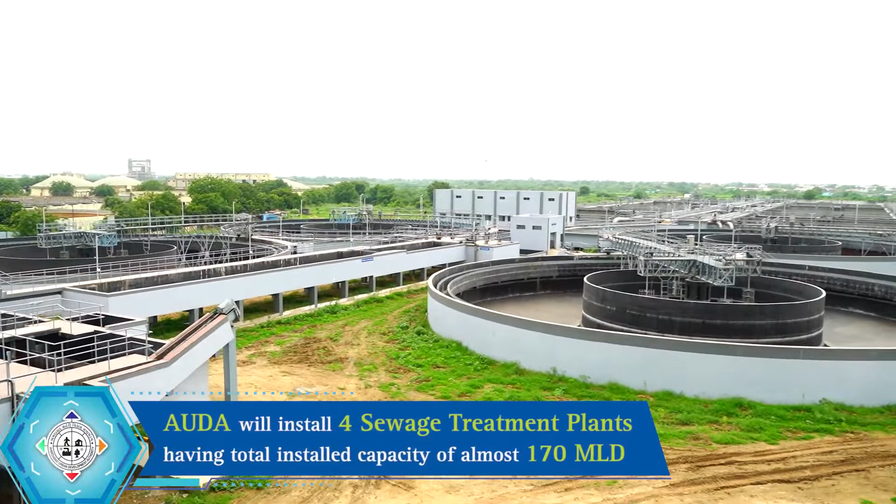As part of the ADB project, AUDA will install 4 sewage treatment plants having a total installed capacity of almost 170 MLD, ensuring adequate STP capacity for population up to the year 2040.

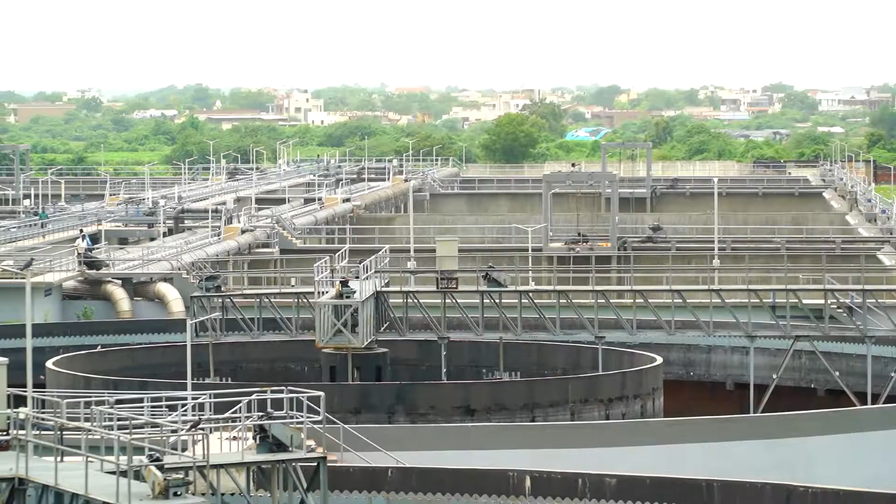Outputs of the project. The treated water will be channeled for irrigation, thereby achieving the water conservation goal of reuse, and tertiary treated water will be provided to industries. This shall result in urban living with sewerage system and stormwater lines providing urban facilities.

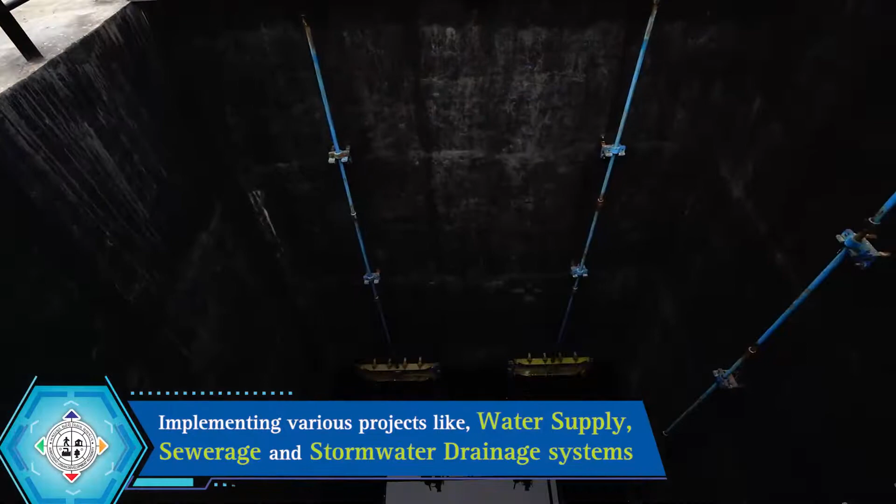Thus, AUDA is constructing 10 bridges on the SP Ring Road and implementing various projects like water supply, sewerage and stormwater drainage systems. With a multitude of people-centric, growth-oriented infrastructure projects under various stages of completion, AUDA has been proactive in planning and implementing projects.

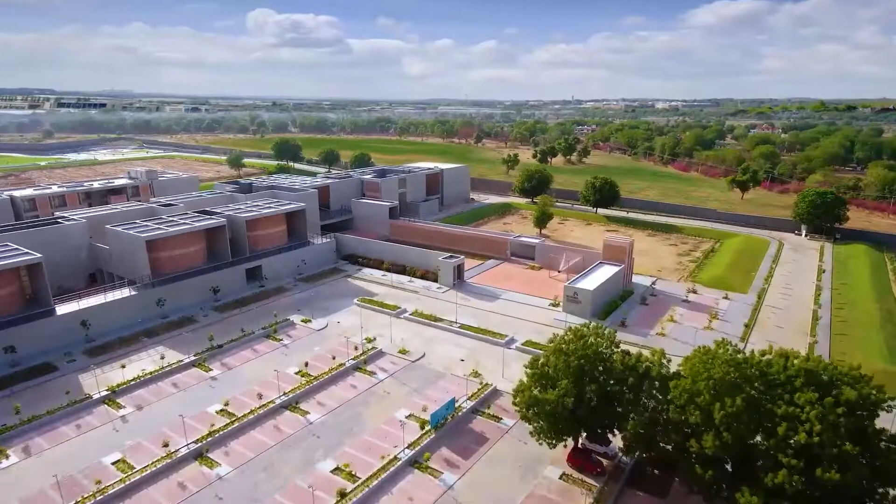It has seized the momentum and has the motivation to transform Ahmedabad urban development area into an iconic region which embodies the philosophy that harmony between man and nature is the best way to coexist.